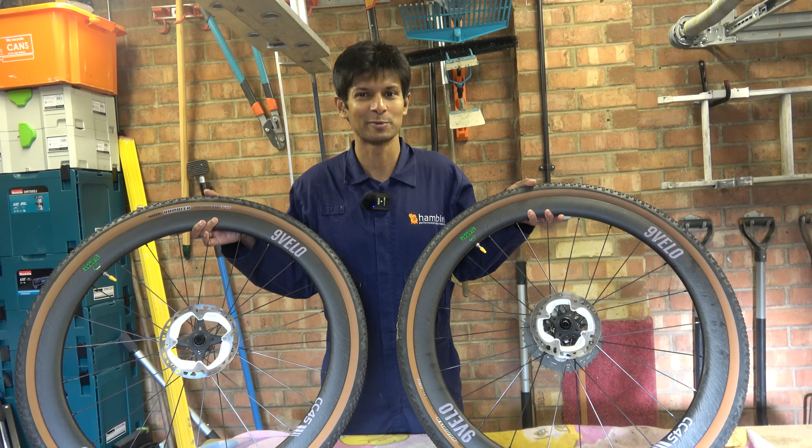Right, today - normally I get stuff on here that's shite, but today is one of those days where we've got something actually really good, unassumingly really good: these 9 Velo gravel wheels. So these rocked up. Now 9 Velo, I've had them a couple times on the show before - their wheels are of very good quality. This one just winds it up to the max. This is probably the best made wheel set I've ever seen, especially in the hub, which we will come to.

So this is another one of those segments where I show you it on the bike. Now the bike is the gravel bike of choice, actually a fairly cheap bike. I wasn't sure if I'd like it, so I bought a very cheap frame and then quite enjoyed it. The handlebars are what came with it. The GPS unit is an iGPSPORT unit - it's actually quite good, so check out the review on that, I'd recommend it. And these are the wheels.

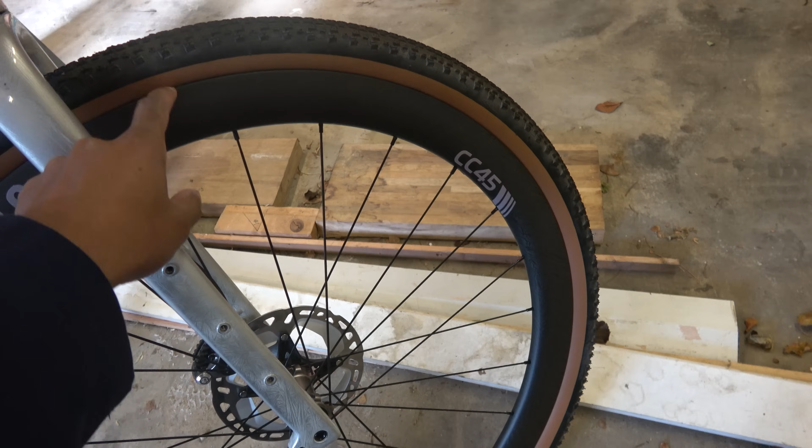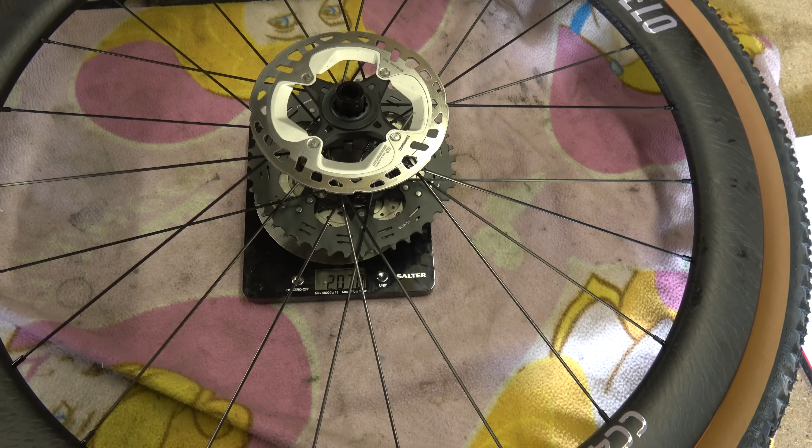So for all you weight weenie pussies out there, the back wheel, the entire rotating assembly, weighs 2,070 grams. And the front wheel, I don't know if you can quite make that out, is 1,544 grams. Now there were some wankers in the comments that said I shouldn't do this on top of the Princess blanket because it would compromise my engineering integrity. Well, to all those commentators out there, go fuck yourself.

What have we got? Well, these are the Maxxis Rambler tyres. I've kind of standardised on these tyres, basically used them completely for gravel. They are not lightweight and not particularly aerodynamic, but they never give you a puncture, and I think the grip's fairly decent. I'm not putting out mega power - I do officially have the same power output as a prawn, and I don't really weigh that much, I am a smidgen over 70 kilos.

Now, where is my pencil? Here we go, here is the pencil. Right, so anyway, there's the tyres, there's the light brown thing around it - this is the edge of the bead.

So these wheels are hooked. Now I think you'd have to be fairly stupid to get hookless wheels and tyres as a combination, because the chance of someone fucking up the manufacturing and getting some dimension wrong in the cycling industry is quite high, and that will land you in hospital.

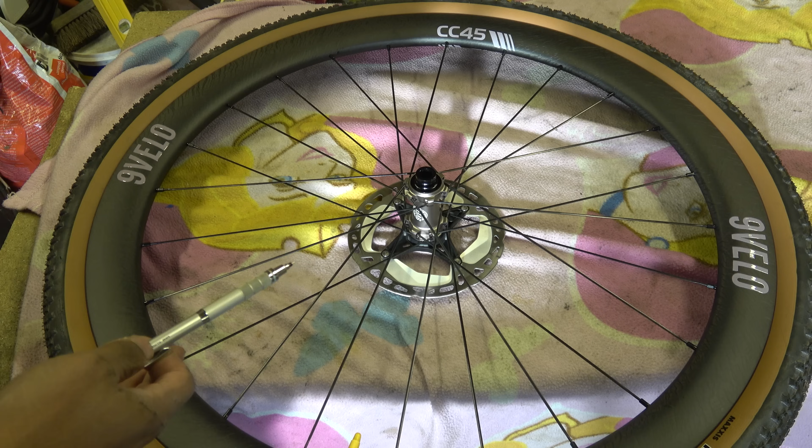Whoever's designed the hub, and to be honest, the rest of the wheel has done a fine job. I wouldn't say it's absolutely cutting edge in terms of the wheel technology, but the hub is. The hub is, I would say, the best hub that I've ever seen.

Now, a lot of people rave on about DT Swiss hubs. I don't think they're that good. Mainly mechanics go, oh yeah, it's a really good hub, but they never really go measure anything and check anything. And if you do, you'll find that, okay, it's okay, but it isn't this. This is the best I've ever seen. I'll take it apart in a minute.

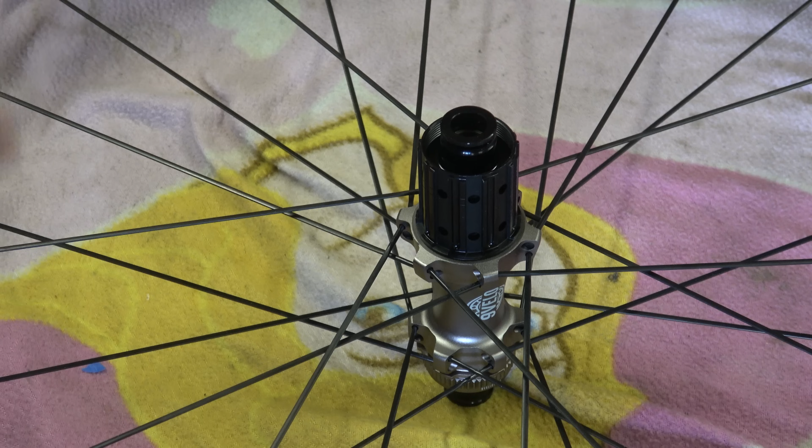9 Velo own their own hub manufacturing outlet, and I think that's probably why we've ended up with such a remarkable hub. It may not look very much, it probably looks like everything else out there, it's just the way this thing's been made and machined is another level. The sealing on here is the best I've seen.

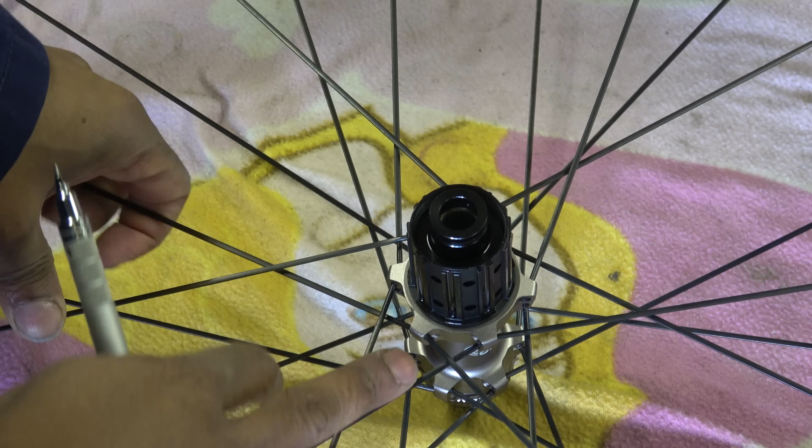So the hub itself has six, let's call them, attachment points with 2 spokes coming out of each. So you've got 12 on that side, so 1, 2, 3, 4, you get the idea. And then there's 12 on the other side, so it's 24 spokes. So it's a strong wheel, there's no doubt about that.

To get this off, you pull this cap off, that in itself has an O-ring, and it's difficult to see probably on camera, but it's like a lip that is almost like a labyrinth. And I'll show you a diagram of what's happening later on. But you know, that's one element, and it's also a good fit.

Then we've got the hub itself. The machining on there is really good, and this has been hard anodized, and I think it's a 2-stage anodizing process. A lot of them are fairly soft, this one isn't. And then you've got the bearing in there, it's full seal on there, and then you can just withdraw it. And again, the fit is really good.

Now I'm not going to pull the whole thing off, or am I? Fuck it, let's just pull the whole thing off. So, oh fuck.

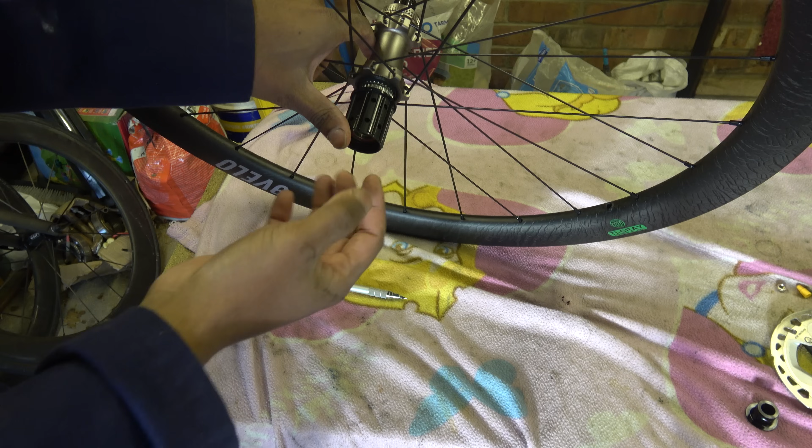If you pull this off, this is like a DT style ratchet. Now, I think DT's patent has run out, and everyone's going to this style. This, again, there's some subtle differences in there versus some of the other copycat brands, which you don't see. So the way that's been sprung is different. The quality of the washers is different. And you can just about make out the colour difference on there. That's harder than most axles.

The other, I think, very telling thing is the quality of the seal actually in there. So there's the spring at the bottom. Hopefully you can just about see that spring there, and the quality of the machining that's actually on the teeth engagement in there is really, really good. The seal, I mean, that I'm not even sure how they made that.

If I was to just show you, if I pop this back on. Right, if I just take the mic, pop this near to it. So this has, it's like a seal within a groove. So let's just pop this in. Hopefully the mic will pick it up.

So what you can hear is the seal, the rubber seal, popping into the groove. Now that might not sound like a big deal, but in order to make that, that is particularly tricky, because the walls are thin, and when spoke tension is applied on here, it actually expands the fit out. So that makes it more difficult to make.

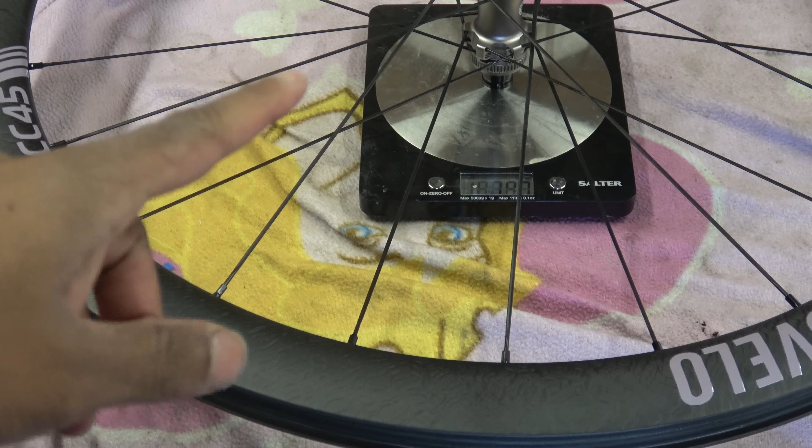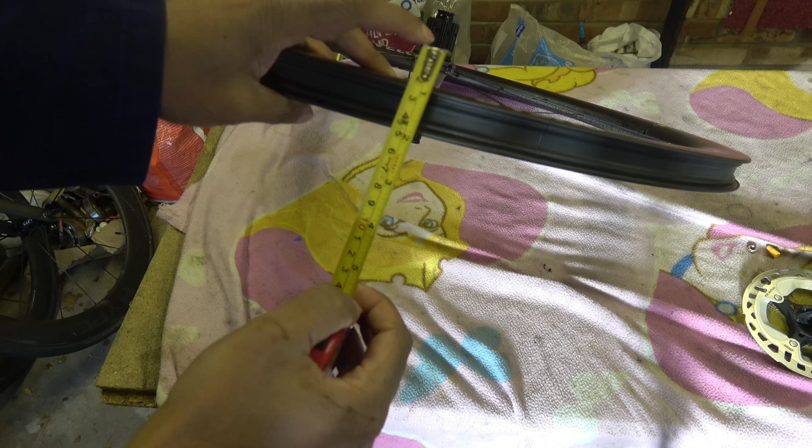The weight of the back wheel before any peripheries or anything like that are added is 797 grams, so it's just under 800. The width is about 26, 27 millimeters.

It's no way near as wide as some of the other wheels, and probably you're probably not supposed to put 45 mil tires on, but it worked without any issues. So 26 mil, and then on the inside, it's 21-ish millimeters.

Rim quality is good. Now I couldn't get in to measure all of the stuff around here, but I mean, it has some clear advantages. The main one is you don't need any rim tape, and if you're running tubeless, you don't really have to worry about putting rim tape in and getting a good seal.

You will have a problem, well, more of a difficulty if you were to snap a spoke, because you would have to put the nipple in through this hole with a magnet and then pull it round to the correct place and then pull it through to get your spoke through.

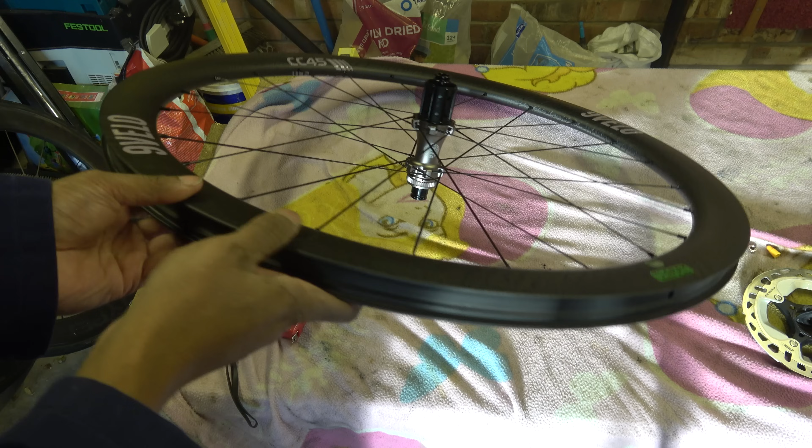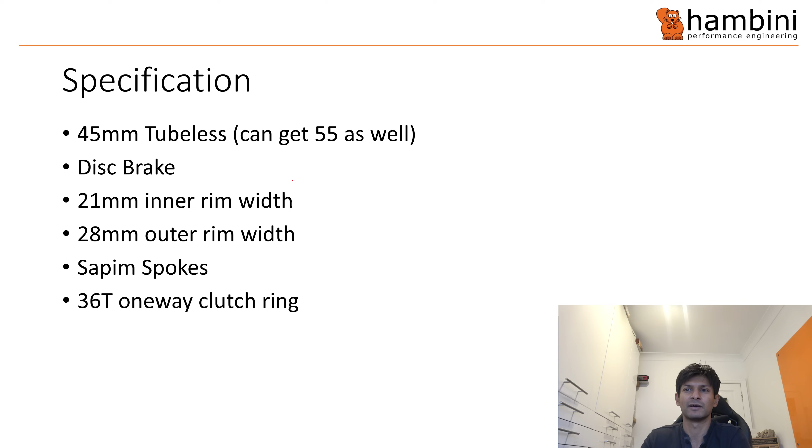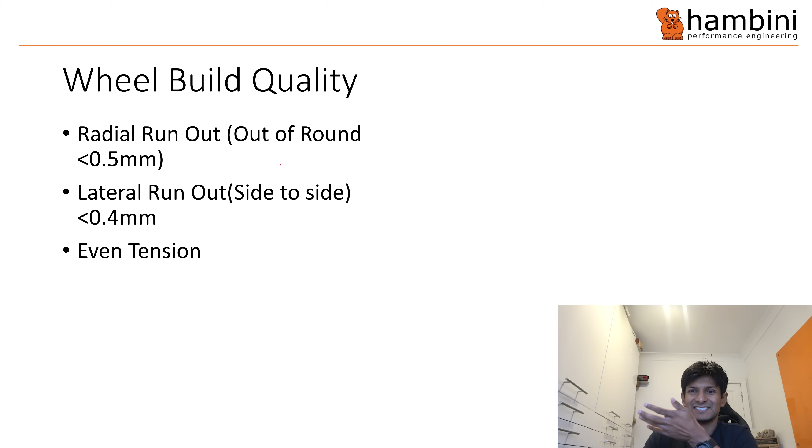Looking at wheel build. I mean, what can I say about these wheels? If you bought them, there's not really anything wrong with them. I mean, the run out's good, lateral run out's good. Okay, they're going on YouTube, but half of this stuff is superior by design, not superior because they've built a special one up for a YouTuber.

Yeah, you can go look at the rim manufacturer pics. It's a bit limited because you can't get all the way around. This is the spoke tension.

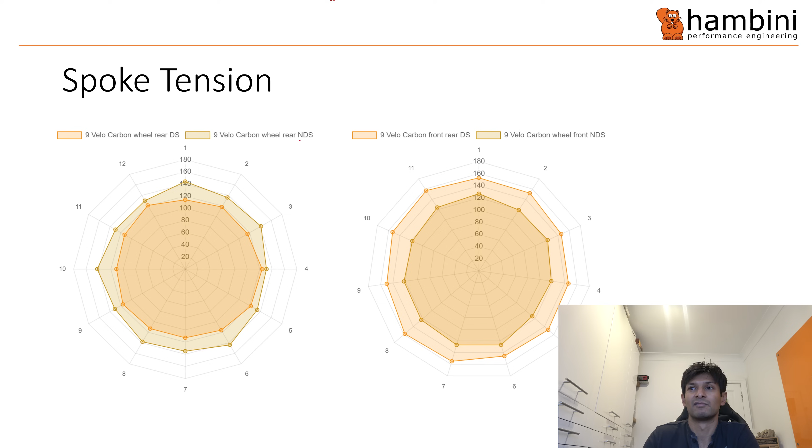It is fairly even. I mean, people look for 5% deviation. And then, yeah, I mean, that's the front, rear, drive side, non-drive side. I don't know really what else to say.

The out of balance, it's not class leading - so the Magine is the class leader - but this isn't too far away. The only slight difference is obviously because there's no spoke holes, it is a bit more tricky to get it so that you've got like even weight distribution all the way around, because you can't see most of it. So you know, take that into account. So you've got a bit of a phase angle difference on this one versus this one, but the actual out of balance value is quite small.

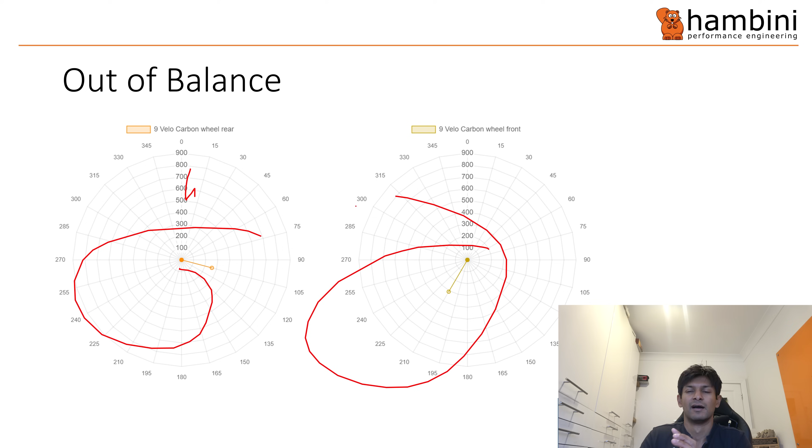Just to make you aware, and I have seen in some forums where they screw this up, the lighter you make the wheel, the more the out of balance matters.

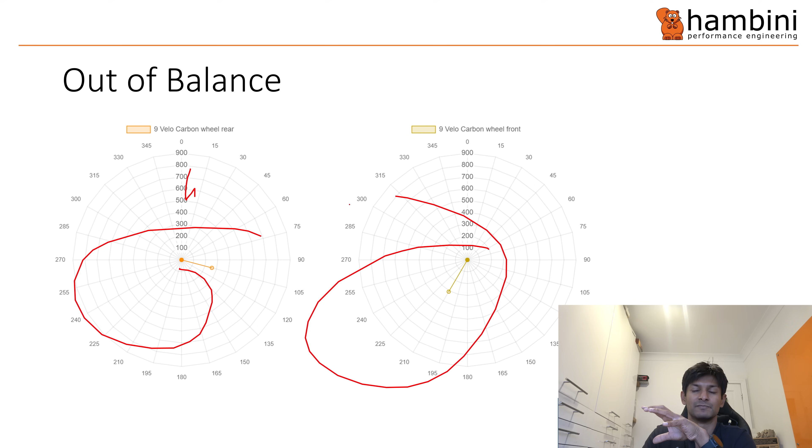So 10 gram millimeters of out of balance on a 2 kilo wheel is much better than 10 grams of out of balance on a 700 gram wheel. So as the weight of the wheel drops, your out of balance tolerance gets tighter. I hope that made sense.

These are the bearings. The fit on them is absolutely perfect. Whoever has machined the bottom bracket and the hub has done a very good job. They look to be CNC machined, mass-produced CNC machined, but there are some features that make me think it's not the usual feeding bar stock machine and then out the other end. It's probably, I don't know for sure, forged, and then the forging's individually machined.

Again, I'm not sure, the hole tolerance when it was under tension was like M5... M7, so the critical number is the second digit. It gives you how much deviation there is in the hole. The 5 is a tight tolerance, 7 is kind of like standard tolerance. 5 is usually a ground tolerance, and it doesn't look ground. So they've obviously done a fairly good job there.

To give you a bit of context, the interference is 0.02 millimeters consistently all the way around, probably slightly less than that. If you were to take an absolute black hollow cage, that's like 0.6, half a millimeter of deviation in the hole. So it's not a particularly round hole. That's one example.

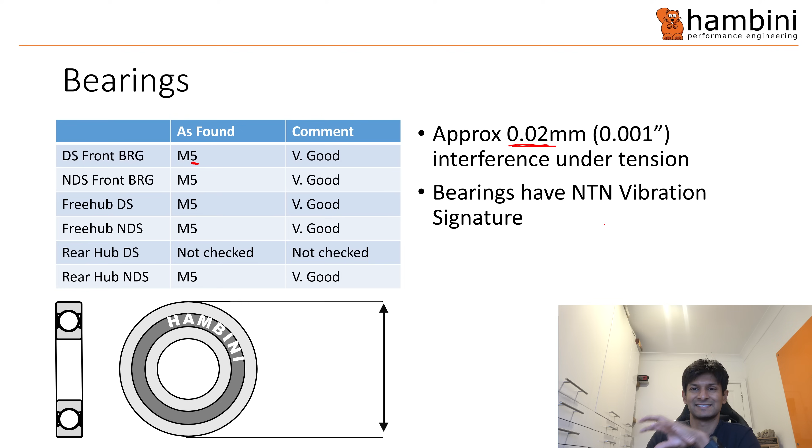The bearings, if I was to look at them blindly without having the seals on them, I would say they were NTN because the vibration signature looks like an NTN. I think that they've gone to the place where the NTN bearings are made and said, give us a set of bearings that are the exact same specification but with a different seal sticker on the outside. It is that coincidental.

So the bearings have a riveted cage, which is like the best type you can get. You can get folded metal cages, which some of the cheaper wheels use. To the end user, you wouldn't notice the difference. Well, actually you would, because you'd have worse vibration, a bit more road noise, and they wouldn't last as long. And the wheel tends to rock a lot more, whereas on these ones, didn't get any of that. So, riveted metal cage, and the bearings are good.

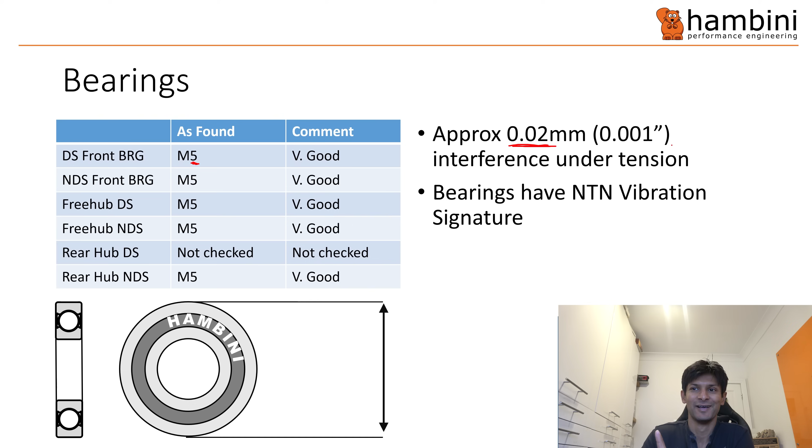And now they're branded TPI, Tung Pei Industrial, which is actually a subcontractor for NTN. So from that, take what you will. I would say this though, I've seen some TPI bearings that are shit. So they obviously come in a bit of a plethora of quality spectrum.

So this is a DT Swiss 180. This was classed as one of the best hubs that you can get, or bicycle shops class these as one of the best. If you do a run out check on there and support it like on a dummy axle, this is what I got: 40 microns just adjacent to where the disc brake rotor goes, 20 microns in there, 50 microns on the periphery of the free hub, and then 30 microns on the other end of the free hub.

That is, I would say, shite. You'd kind of like expect zero. If you were to take the free hub away, what you've got is the bearing clearance would give you the run out. And these aren't, I would say, all that good.

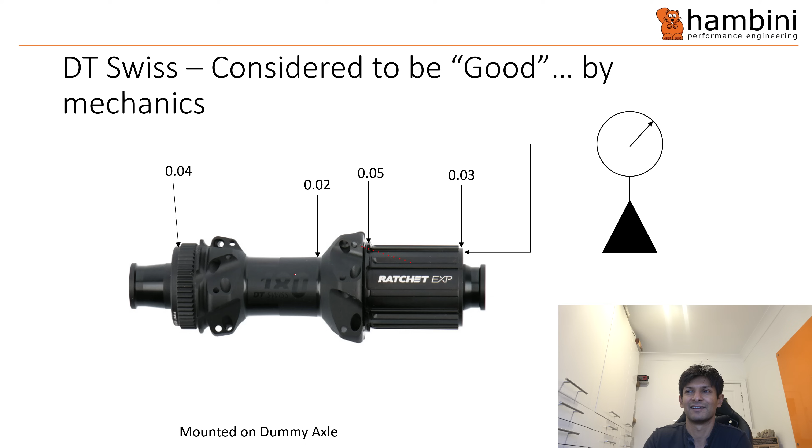Now, I believe the same company, TPI, makes the bearings for this. I'm not totally sure, but I have seen some DT videos where there's TPI in the background. So from that, take what you will.

This is the 9 Velo. I'm not sure why it says Corsair 540 there. Ah, fuck it, probably a cut and paste job.

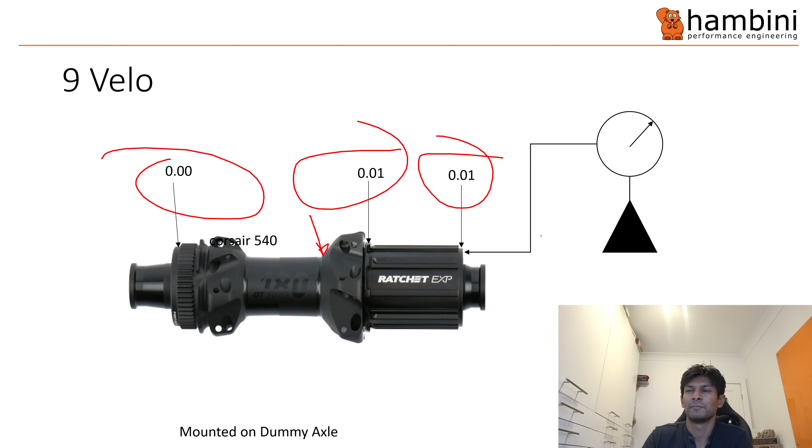We've got 0 on that side, 10 microns on that side, and another 10 microns on there. Now I couldn't get in here because the spokes are basically in the way. So yeah, you can see there's a huge factor of difference in there. This is a better made hub than the DT Swiss. Okay, I've used the same picture, so that should really say 9 Velo, but you get the idea.

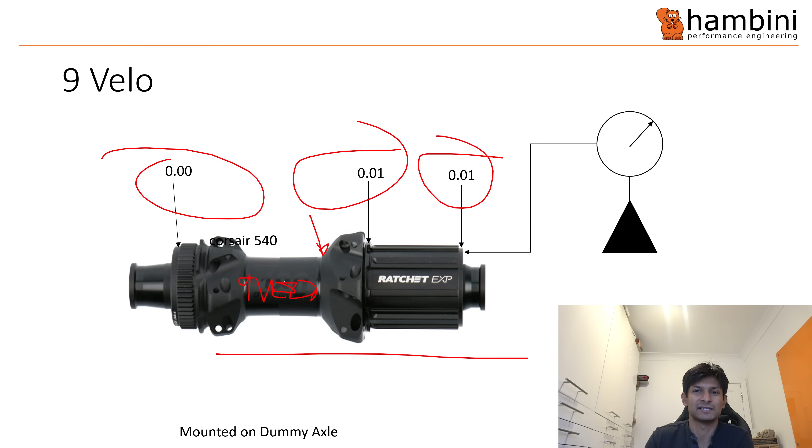From an engineering perspective, this is just a league above. The sealing on this hub is what you would term as a labyrinth seal. Now, to explain how this works, let's assume we've got high pressure here, so we've got high pressure air.

Pressure wants to equalize itself, so it wants to get from here to over here. One technique people use is a labyrinth seal. Air comes along, swirls around, swirls around, you get the idea, and then leaves. That is a tortuous path, and the tortuous path reduces the flow or leakage out. It also means that if you're trying to stop dirt getting in, it's got to go around a fairly tortuous path to get in, but it's not perfect.

It's not perfect because if you were to fire a pressure jet of water through that gap, it would just go all the way through. That's effectively what a non-contact seal is. It's just a very, very small gap, but it's not impermeable.

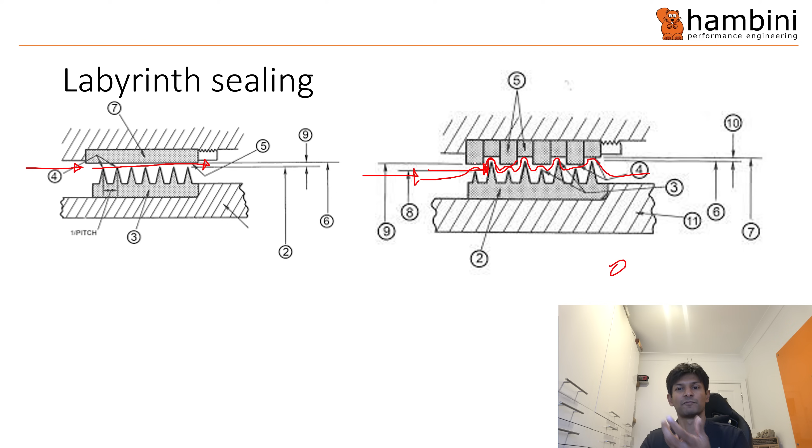A slightly better one is a stepped labyrinth, you can see that over here. Now you've got to go around there, up, round there, through there, round there, round there. You can see the tortuous path is now a bit more tortuous. If you were to fire a straight jet of liquid in that way, you'd hit this peak part of the labyrinth, and then have to go all the way around. If there's enough pressure, it will go around, but it makes it much more difficult to get through.

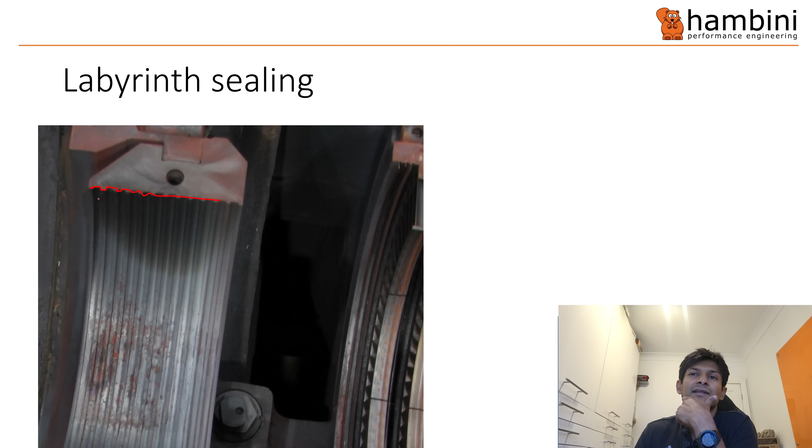And this is it in practice. This is the insides of a turbine, and you can see the stepped bit of the stator, and then the corresponding bit which would sit in between. You can also see another one over there, some leakage there.

Now, in the case of the 9Velo hub, what they have is a groove that sits inside the hub, and then the seal goes in here. So let's say that's the shaft, and this is the seal.

That is not an easy thing to machine because you've got a few issues that can arise. The main one being, because this is all a tolerance stack up, that you machine it wrong. Let's say you move that seal in a little bit too far - you're now touching on here, so you've got a load of unwanted friction. That is a realistic possibility because the preload and all that kind of stuff is a tolerance stack up.

The gap that they've got in there is like 0.1, 0.2 of a millimetre. It is absolutely 3/10 of fuck all. And that's one strategy of doing it.

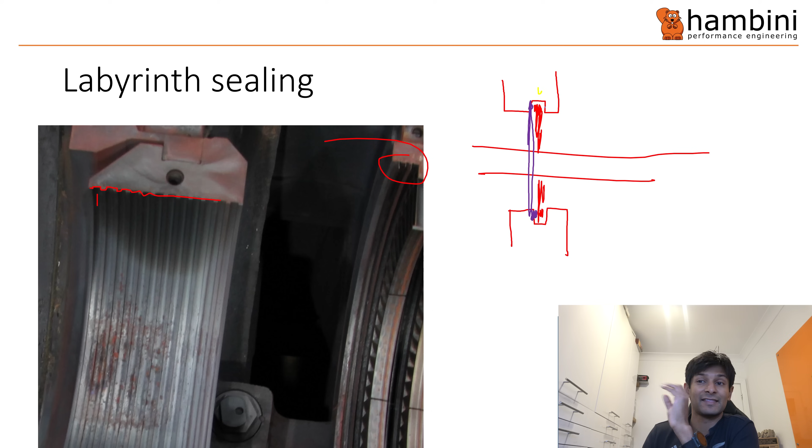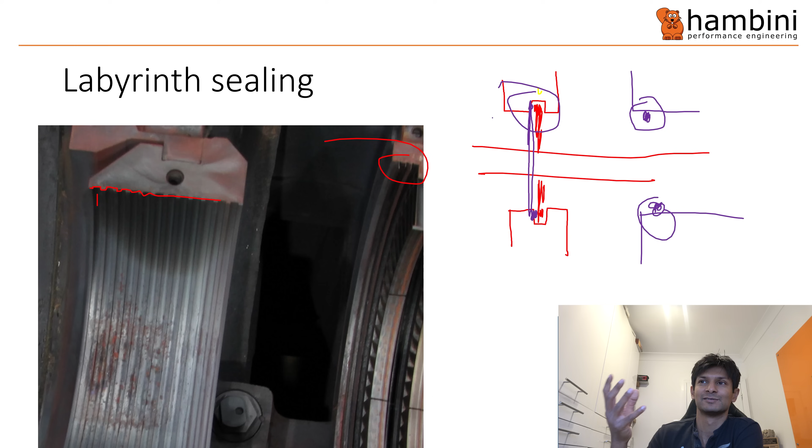Now, other manufacturers tend to use what's known as a floating seal. A floating seal doesn't have this lip in it - all it's got is a straight seal that just rubs up against the outside like that. So now you've got a friction point round there. On this seal it rubs ever so slightly, but we're talking like 3/10 of fuck all. So they've got to machine the groove radially accurately and also axially accurately - two things. And then the tolerance stack up of the rotating parts to go in it is again something they need to consider. So, you know, that is pretty flipping good.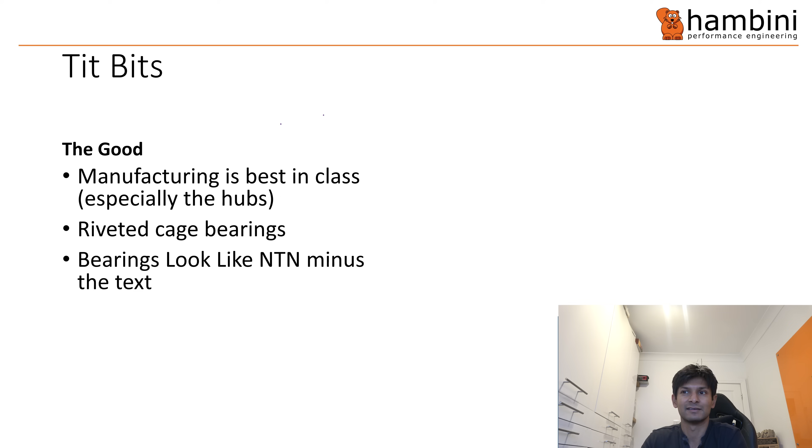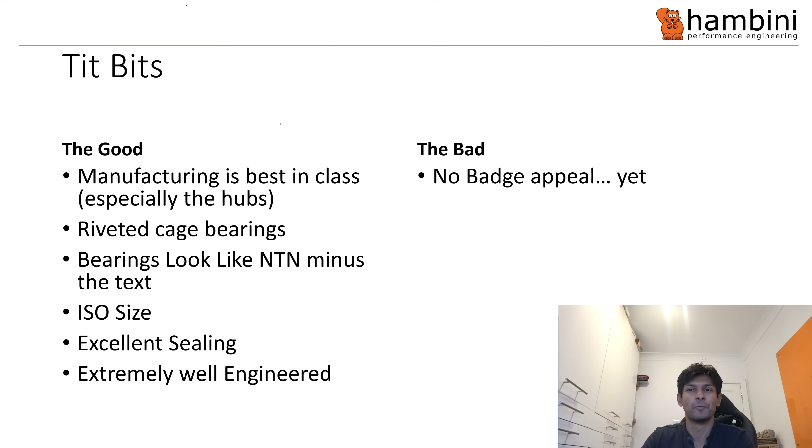Right, tidbits. I've kind of expressed this before, but this really is the best. Riveted cage bearings, ISO size, excellent sealing. There's no badge - so if you don't know who 9Velo are, or don't care, it doesn't say like Zipp, or ENVE, or anything like that. So you pay a lot more money for those brand badges and for the labour from Ogden, Utah, or wherever the fuck they're made. But yeah, I don't think they could touch this. Nobody, absolutely nobody. I've only just described the seal, but the rest of it is just the best.